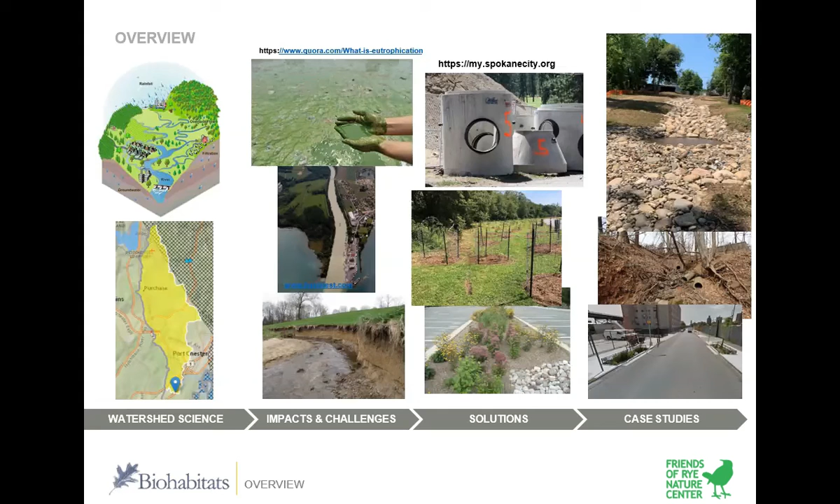So before reading the definition on here, how many folks in the audience know what a watershed is? Okay, cool, so everyone kind of knows what a watershed is.

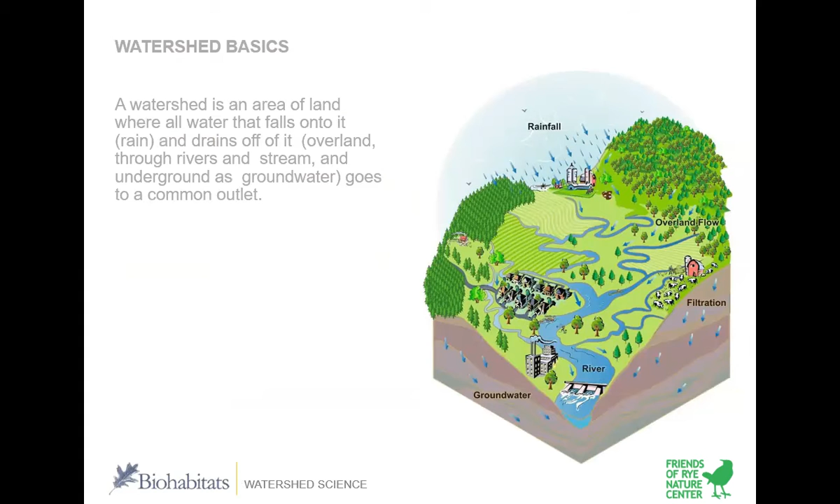A watershed can really be anything where water falls. It's essentially the delineation of an area where any drop of water that falls on that area goes to a single point. So all of our land is part of a watershed, but watersheds can also be as small as a rooftop, draining to the gutter on your house. It could also be like the Mississippi Basin, which is almost half the country. So it really depends on where you're defining your outlet point for what a watershed is, and thinking about how you're going to manage the land in that watershed.

So really thinking about scale for all these projects is important, because that's going to depend on how much water you're dealing with and the types of problems you're dealing with within the watershed.

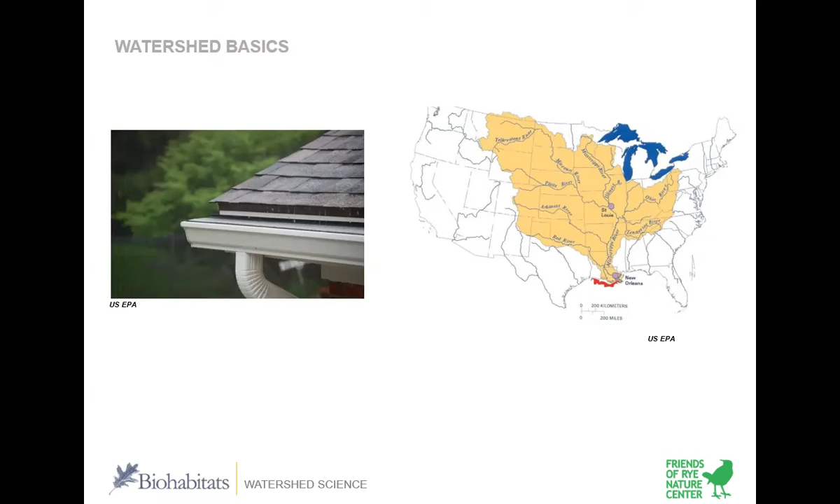It's pretty preliminary, so we use it for high level analysis—like what's the rough size of the watershed, or what might the 2-year storm event look like, just to get a sense. We do more thorough modeling and analysis when we're actually designing a project on a site. But it's a great tool for folks to use to click and see where the water adjacent to their property is coming from.

So as we're thinking about how water is moving through watersheds, and thinking about flooding and water quality, what might impact how water is flowing in the watershed? Anyone have any thoughts?

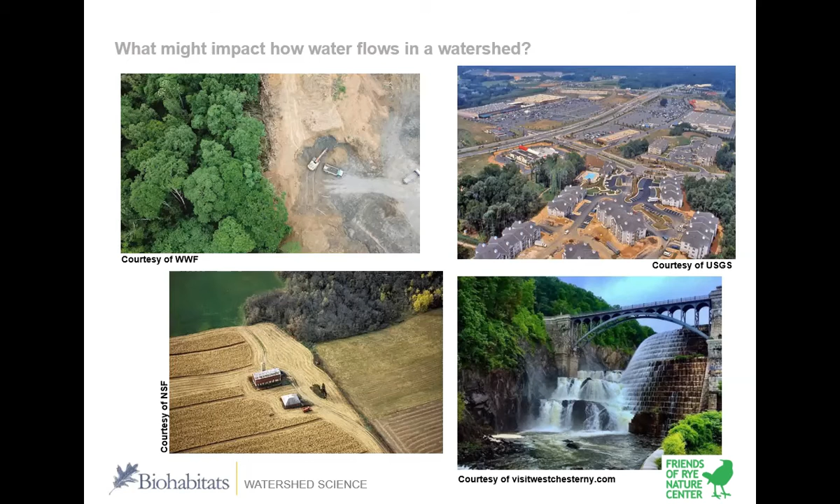When you start to remove trees, even agricultural land or meadows, and you start to see more parking lots and buildings, that has a really dramatic impact on how water flows through the system and the quality of your water bodies—your receiving water bodies throughout the watershed.

When you change an island like Mannahatta into Manhattan, and it's completely covered in asphalt, buildings, and concrete, it's a very different system when water's falling on it than when the Native Americans lived here.

As a water resource engineer, thinking about resilience and flooding, especially in urban systems, the main thing we look at, or one of the primary things, is impervious cover. Have folks heard of impervious cover before? Seeing a lot of nods. If you're used to flooding, then I'm sure you've heard about it quite a bit.

In a forested landscape, water lands on the surface and infiltrates into the ground. Before it even lands on the surface, trees and plants are intercepting that precipitation. A lot of it infiltrates into the ground and moves slowly through the subsurface as groundwater, slowly making its way to a stream, river, or lake.

When you start to put roads and buildings onto a landscape, there's nowhere for that water to go—it doesn't infiltrate into the ground. It's usually moved through pipes, whether gutters or subsurface pipes, to quickly get that water away from human property as quickly as possible. That has a huge influence on how water's moving throughout the entire watershed.

Can I ask a bit more about piping in general? If we take what's occurring naturally to the watershed, some would argue that solutions for flooding issues or water problems is actually piping things in different directions. Can you give your insights on how that may affect the watershed and natural flow of water? I don't really know what that entails or why people argue for that.

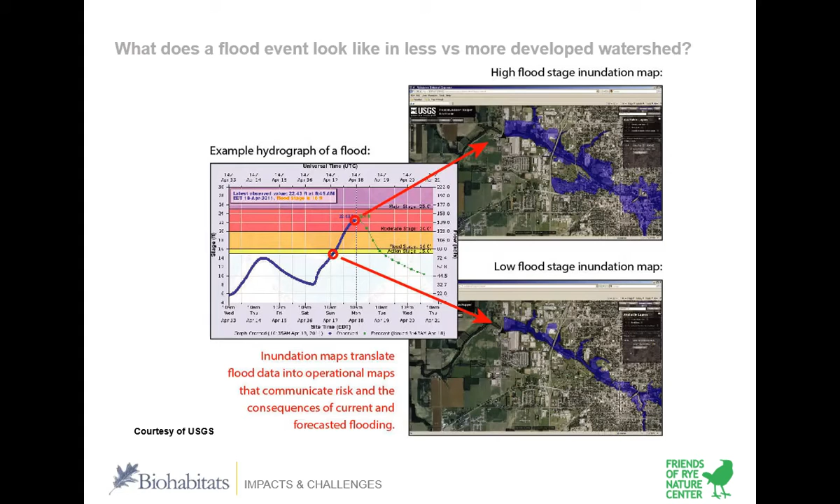Cool. So that's the brief hydrology watershed basics. Is that kind of clear to everyone? There may be questions on how that works. Then moving into how does the urbanization of a watershed, what does it do to our ecosystems and to our water bodies? And what are some of the issues that we've seen?

I'm sure you guys have probably seen this throughout your neighborhoods or your community: erosion, especially during these large events. When you get that flashier system, you have higher flows, higher velocities, more scour in your streams, and that results in this dramatic erosion in channels and at outfalls. And that's exacerbated even further when you start to remove riparian vegetation like trees and shrubs, because those roots are holding that soil in place. Once you remove those, it just starts to eat away and erode. That causes all kinds of problems, especially if you have structures adjacent to these banks, but also all this erosion means sediment is moving downstream.

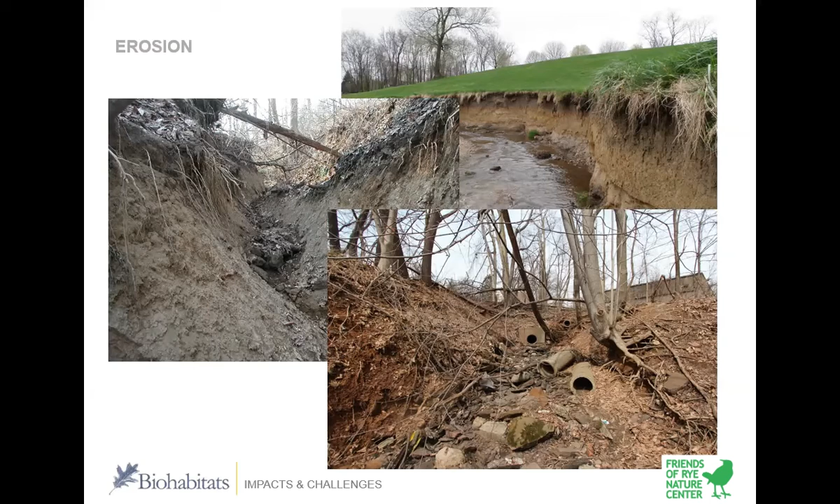And then very briefly, I did want to talk about combined sewer overflows, because one of the case studies that we look at is concerned with combined sewer overflows. And I know it's common in the Northeast. Have folks heard of combined sewer overflows before? Okay, cool. Getting nods. Not always the case.

So it's pretty gross. In a lot of older cities, the storm drainage, the pipes that collect all the rainwater, are the same pipes that are carrying the sewage from your house to the wastewater treatment plants. And they're only sized to a certain carrying capacity, a certain flow rate. So during some large storm events, that capacity is exceeded, and all the material that's in that pipe is discharged out to a water body because the treatment plants can't handle it.

And I think in most of the communities, if not all, in Westchester County, it's all separate sewers. So your sewage and your stormwater are separate, and so it's not as much of a concern. But I did want to just talk about this because it's a big issue in New York and in New York City, and that's one of the case studies that we're going to look at.

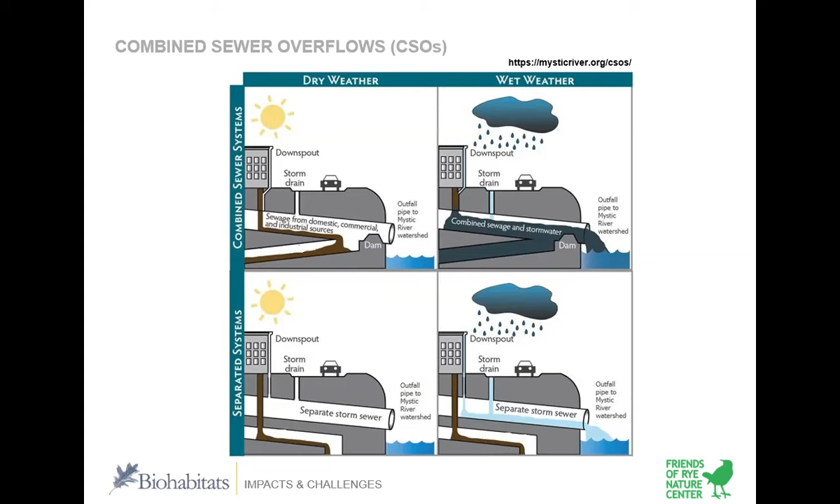So the impacts of erosion, the impacts of impervious area, combined sewer overflows, basically changing how the water is running off the land and what it's running off over, roads, agricultural lands, has a lot of water quality impacts too. And so I know, especially given all the big storms over the past summer, water quantity, like volumes and flows, is a big concern, but a lot of times in the work that I do, water quality is really the driving force, especially of some of these nature-based solutions, because even small rain events, like a 1-inch rain event, can have really negative implications for water quality, because you have fertilizers running off into water bodies.

Even with that erosion, you have all that sediment going off. And so it causes turbidity. It negatively impacts aquatic vegetation. With all the nutrient runoff, you get a lot of algal blooms, which obviously can shut down water bodies in terms of recreation. And then you get fish kills, really poor for aquatic life. And so a lot of the work that I do is driven by improving water quality in the receiving water bodies so that it's suitable for aquatic life and for recreation for humans. And again, the key things we're looking at are nutrients and sediment; in a lot of the water bodies that I work in, those are the primary drivers that we're looking to control.

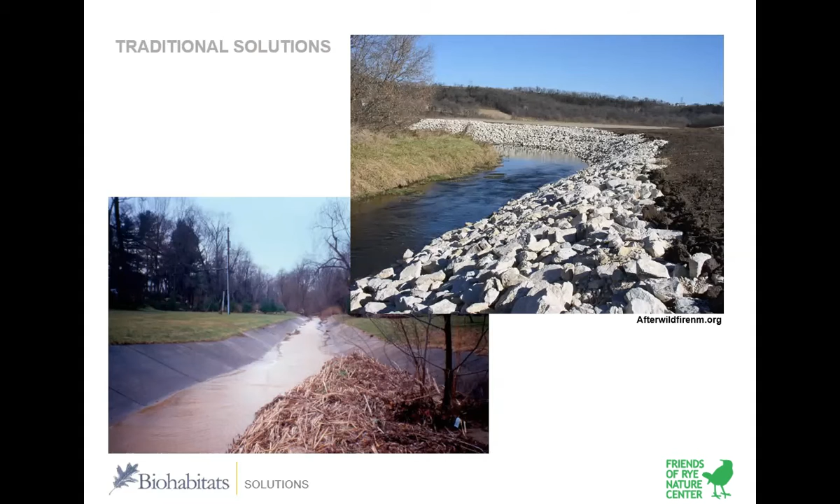And then on the water quality side of things, we do have wastewater treatment plants. For combined sewer overflows, they have large tanks that just hold the stormwater and slowly release it into the sewer system so that it doesn't overflow.

Again, these are really large, what's called gray infrastructure. So big tanks, big pipes. They're effective. They tend to be very expensive. They're also not very adaptable. So you build a tank or a wall or a pipe to a certain size, and it's going to only convey what that design flow is. And they don't really have many co-benefits. They're not providing any habitat value. People aren't recreating with them.

So just some of the considerations that, at least firms like Biohabitats, we're really excited about the nature-based solutions because they offer some of those co-benefits. But again, want to be clear that oftentimes it's a combination of gray and green that needs to be done to meet goals, especially when we're thinking about really large storms like the ones we've seen.

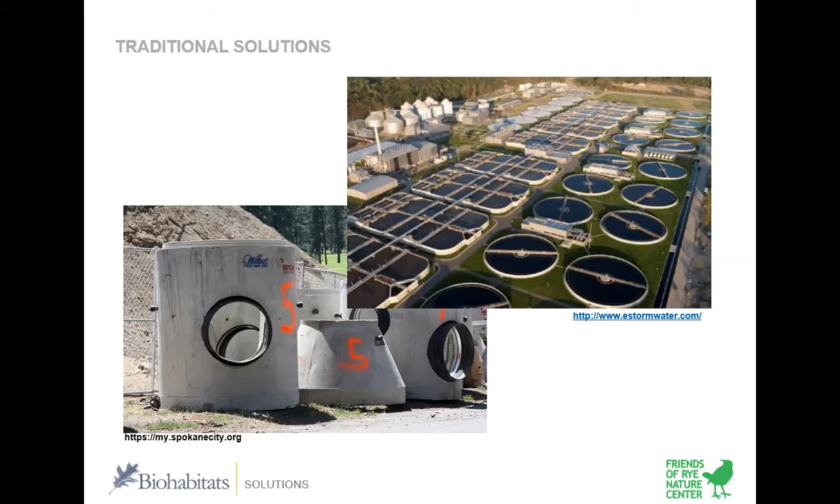In terms of the nature-based solutions, I'm going to go through a couple of general strategies and design approaches that we take. I've tried to group those strategies into 3 levels of design. So there's conservation, restoration, and regenerative design, going from least intensive design to most intensive design.

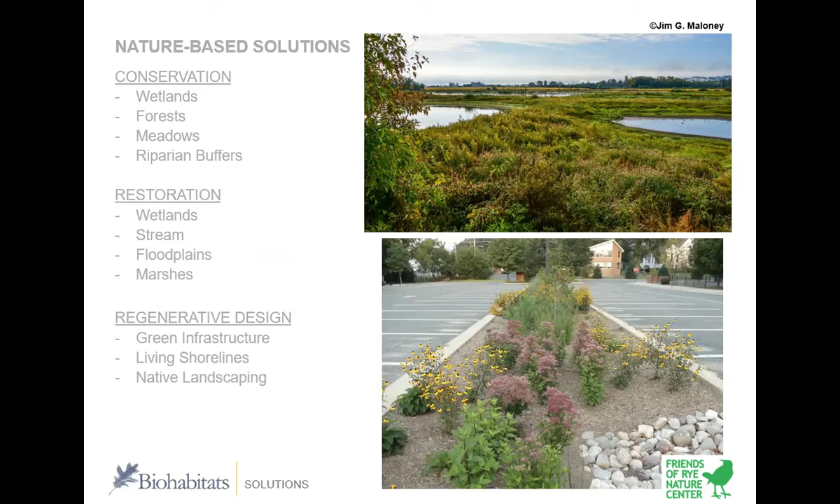And they all relate to these natural systems that we're familiar with: wetlands, forests, riparian buffers, whether it's trying to preserve those ecosystems or trying to mimic them or restore them, or really just trying to take the function that they provide in the landscape and mimic that through an engineered design in a more urban system.

So I like to start with conservation because I think it can be the easiest in some instances. If you have a healthy ecosystem like a wetland or a riparian buffer that already exists in your watershed, try and do everything you can to preserve it. And so there are state regulations, obviously, around wetlands and everything. Those things exist, but I think it's easy to say, oh, I'm going to just develop this wetland, but we'll mitigate it elsewhere. And so I do think that conservation where it's possible is really important.

And I know I'm preaching to the choir here. You guys are at the Rye Nature Center, but I just think it's really important to note that, because so many times, especially engineers, we just come up with an engineered solution to something. And oftentimes, if there's something that exists, it can be more valuable than whatever we design.

And when you're thinking about conservation, a large bit of planning and assessment needs to go into that. So you need to know what resources you have within your watershed or on your property. Is this wetland high value? What kind of value is it providing? And so there is some planning that might need to go into that.

But a lot of communities, I know Westchester County is going through this right now with a couple of watersheds, through watershed planning activities and watershed management plans. These types of resources are identified, and you can kind of move forward then knowing that we have these resources in this area of the watershed that need to be preserved.

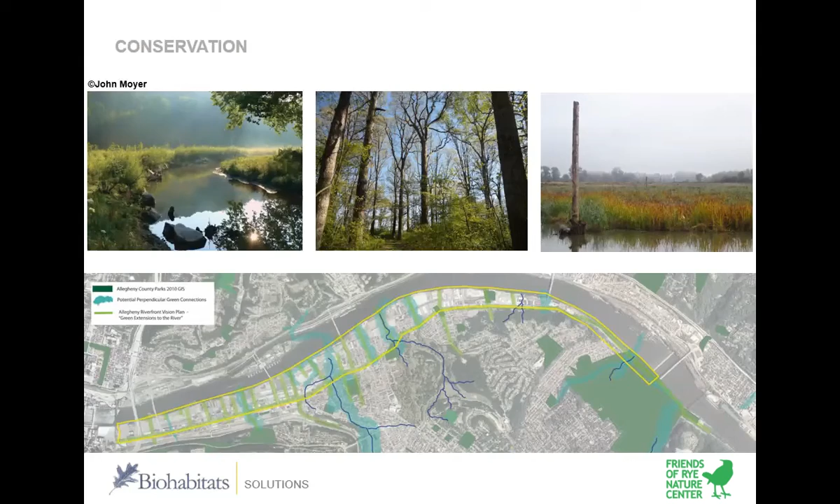Or residents. I'm a resident too, I'm also in a watershed in New York City. This slide was just to demonstrate that...

We recently completed a study for an area in upstate New York, and we found that wetlands on average can be valued at like $500 to $1,000 per acre in terms of their flood mitigation potential. It really depends on where you're at, because when you think about flooding and vulnerability, it's how much flooding, but also what are those assets that are going to be flooded, how valuable are they. So it's hard—I don't like putting a monetary value on it, but it is helpful for a lot of people to see that.

In a lot of the areas where we live, especially in the Northeast, you don't necessarily have a lot of intact forests or wetlands to conserve, so you might need to be a little more proactive. Oftentimes we'll be asked to do restoration projects, often on agricultural lands or old vacant lots, where we're trying to restore the ecosystem that was there previously—restoring the ecosystem services of flood mitigation, water quality improvement, and habitat that those ecosystems provided.

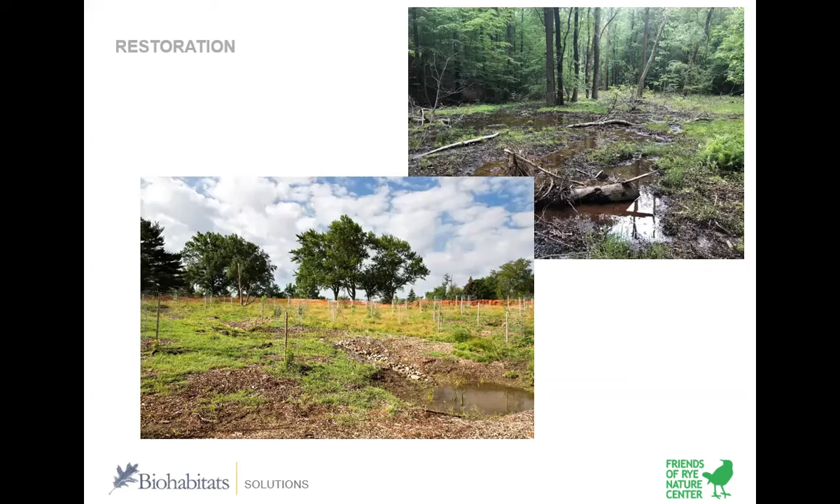Even in areas that are more developed or manipulated by humans, you can still do restoration. The bottom left here is an old golf course where we did a large restoration, restoring a wetland system by creating microtopography, planting native vegetation, and diverting flows through the landscape to restore natural hydrology. The top right photo was an old eroded gully where we created a vernal pool wetland system, again trying to restore what a natural ecosystem would look like in that context.

Restoration doesn't always have to involve heavy grading and realignment. We often do a lot of native planting for restoration work. These are two riparian buffer planting projects we've done, one in Connecticut and another planting native tree species along a river. This restores habitat, provides stabilization to the soil so it's not eroding, breaks up the soil, and promotes infiltration.

I know when speaking with Laura that you guys are doing some of this activity here. New York State has a really good program called Trees for Tribs, which gives money to communities to plant trees along tributaries. This is pretty straightforward and doesn't require heavy machinery or equipment, but we're restoring some of that ecological function to the landscape.

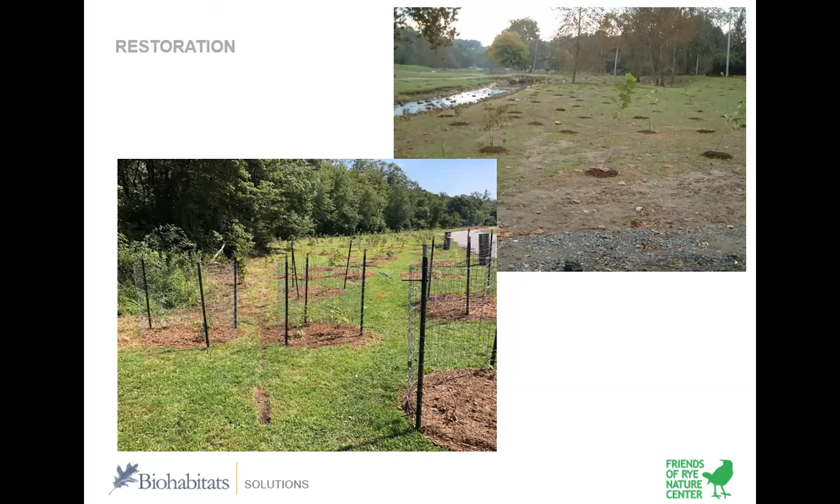Moving on to what Biohabitats, or what I'm calling regenerative design, these are interventions that are a little more heavily engineered. The idea is to mimic natural systems rather than completely recreate them, mimicking their function on the landscape and what they provide to the watershed or contributing drainage area to a water body.

They can look very natural, but they're generally in more constrained areas. Here we might be looking at what we call regenerative stormwater conveyance, which is what the top two photos show. I'll get into more detail in one of the case studies.

Or living shorelines. You have these hardened shorelines in most of our urban areas, and we try to soften those with natural features like wood, stone, and vegetation. They can look very natural, but are generally in smaller areas and are designed to optimize ecological ecosystem services and function.

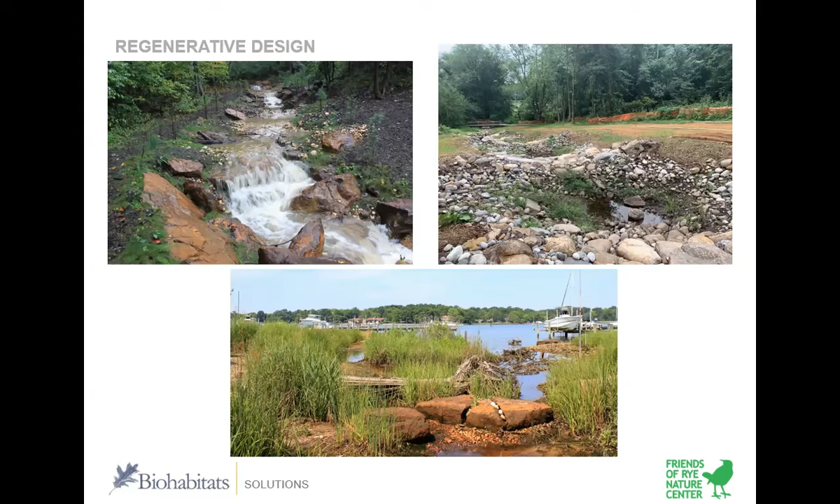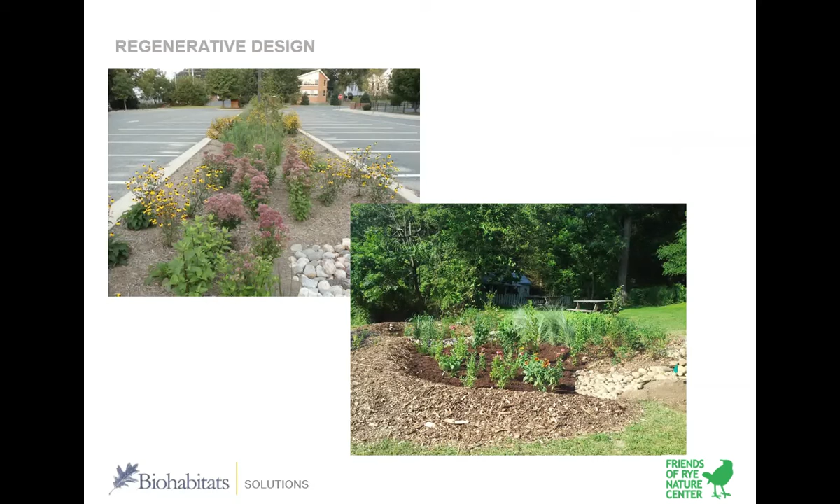Getting even more constrained, into more urban environments, are bioretention systems or rain gardens, which folks may be pretty familiar with. You often see them in parking lots along roadways. These systems are very easy to install on private residences, managing runoff from your roof or driveway, and they can also be really large. They're effective because they can be retrofitted into parking lots or places where impervious areas are already dominating the community, helping restore some of the natural hydrology by infiltrating water or having plants take it up.

I'm going to quickly go through the next two, but happy to talk more about them if people have questions.

Even more urban are green roofs. They've definitely gained popularity recently. They probably don't provide as much water volume benefit as some of the other interventions we've talked about, but they do have co-benefits for pollinators and can be really nice aesthetic features. If you have rooftops, people can go up and picnic, like at Brooklyn Grange in Brooklyn, which is a huge farm that actually sells produce. I'm a huge fan of green roofs. They're a little more challenging since you need structural engineering involved, rather than a rain garden, which can be as simple as digging a pit with good infiltrating soil in your yard.

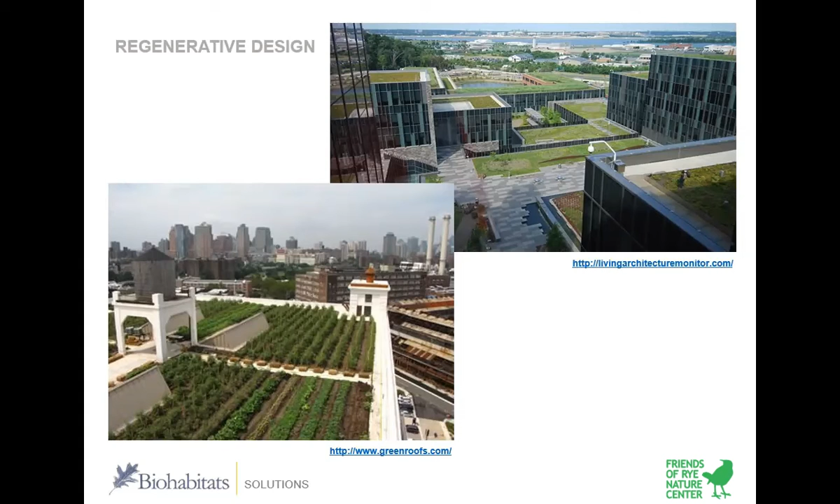Happy to talk more about rain gardens too, if anyone's interested in installing one. It's fairly straightforward, just some slight engineering that you would need, and there's good guidance online from UConn on that.

So those are the solutions I wanted to touch on. I'd love to dive into any that people are particularly interested in. Also, realizing how we're doing on time, I do have two case studies, one in New York City and one in Bergen County, New Jersey, that might be good prompts to get people thinking about how these are applied. If anyone has questions on any of those solutions, from general conservation planning to restoration projects to some of these more engineered regenerative systems, feel free to ask.

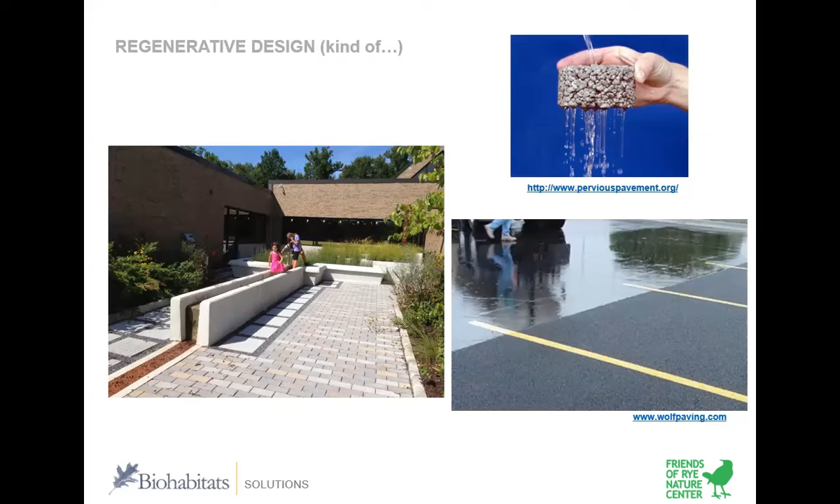I mean, yeah, it can be similar. This is my world, my profession, and I don't think anyone has a real clear definition—everyone defines things differently. New York State DEC does distinguish between bioretention and infiltration basins or swales. It depends on what vegetation is in there and probably what the design layout is. Swales are generally thought of as more for conveyance, so you can think of it as a vegetated surface conveyance system. An infiltration basin is designed to infiltrate, but it doesn't necessarily have to, and it also doesn't need to have vegetation in it. A bioretention system is going to have vegetation in it—bioretention is basically the same thing as a rain garden. I'd say the DEC's stormwater manual is probably what I'd use for definitions, but the idea is the same: if you install an infiltration basin or a rain garden, it's providing a lot of the same services. You'd probably just want to plant it with native vegetation because then you get pollinator benefits and things like that.

All right, cool. So to go through how some of these solutions are implemented in the real world, I thought we could talk about what New York City is doing in terms of green infrastructure. Are folks familiar at all with New York City's green infrastructure program? It's pretty robust and one of the older ones in the country. Raise a show of hands—anyone familiar with it? Okay, cool.

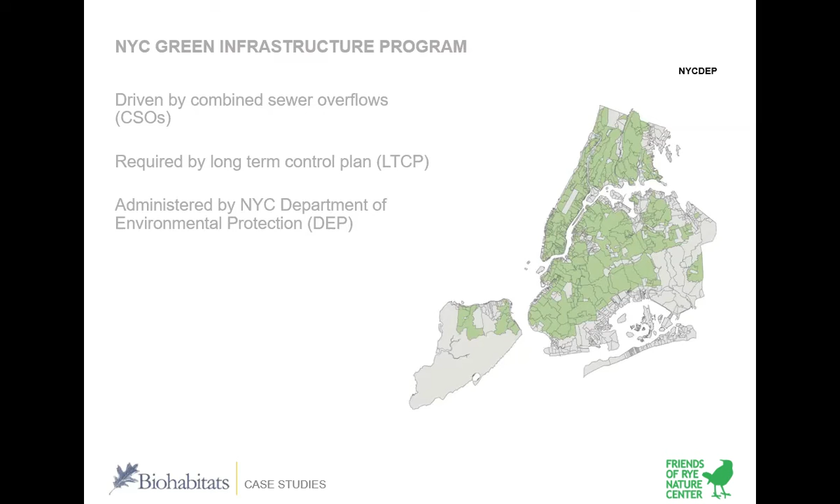It's pretty exciting—they started in 2010 looking at green infrastructure, and it's largely driven by combined sewer overflows, or CSOs. All of the green areas on that map are areas that have combined sewers in New York City, so they have a huge issue with combined sewer overflows. Storms of just an inch or more will cause overflows. My neighborhood is in a combined sewer area near the Gowanus Canal—you go down there and you smell it, it's pretty gross. Their green infrastructure program is being driven by combined sewer overflows and required by the state through their long-term control plan. They've been at it since 2010, and it's New York City DEP that administers it. It's pretty impressive what they're doing.

They're attacking it from multiple angles, largely targeting public property because that's what the city owns and has control over. That's where they can implement projects without needing approval from private landowners. So they have right-of-way green infrastructure—going into sidewalks and roadways—public property retrofits on parkland and schools. They also have some public-private partnerships, and a grant program where they'll actually pay for all the design and construction of green infrastructure.

So the idea of this program is to manage a certain size storm, a pretty small storm, and infiltrate or hold that water before it gets to the storm sewer, the combined sewer system. The idea is to have a bunch of these decentralized assets capturing water within a small watershed. Think of a watershed as even just a block or a neighborhood in the city, trying to have a bunch of these small practices - they call them practices or assets - holding water so that it doesn't reach the combined sewer system. So you're reducing the amount of flow and volume getting into that combined sewer system, which then reduces the number of combined sewer overflows, or the frequency of those overflows. Does that make sense?

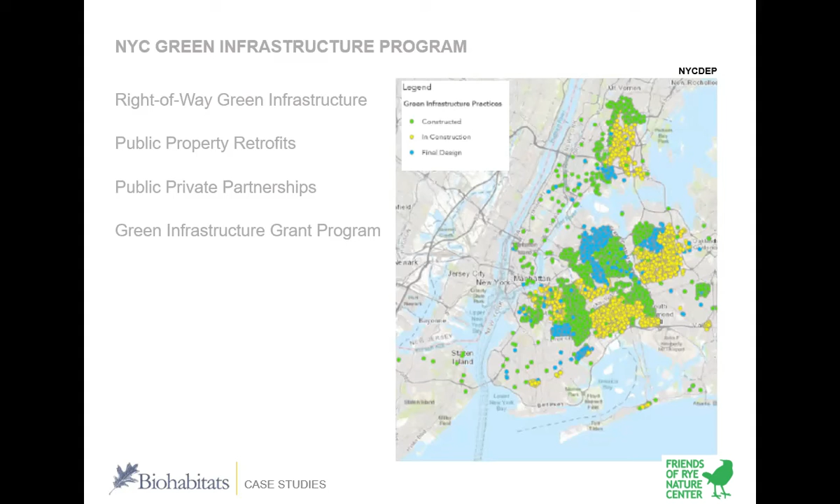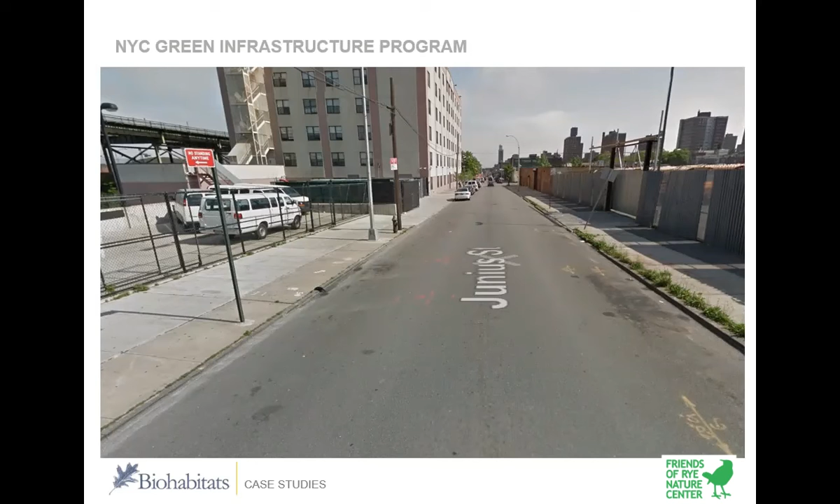I think one of the most common practices they're using is right-of-way green infrastructure, so right-of-way bioswales or rain gardens, and they're going in all over the city. I worked at Biohabitats now, but I used to work at New York City DEP - I started in 2013, and they had a few hundred bioswales installed. Now they're up to like 9,000, maybe more than that.

So this is just from Google Earth, going in basically on sidewalks throughout the city, in all those combined sewered areas, and identifying particular locations where these right-of-way bioswales can go. So like I was saying, the idea isn't that it's taking water out of the combined sewer system once it's in - it's preventing it from getting in there. So this is managing runoff from the road and from the sidewalk. The water goes down the gutter, there's little curb cuts on the bioswale here. Water goes in, infiltrates into the ground, and doesn't end up making it to the combined sewer system.

Do you have any studies that can dictate how many of these things you need in order to have a measurable improvement in the water quality?

Yeah, so DEP - I don't work at DEP anymore, so I'm not speaking for them right now - but I would direct you to New York City DEP's most recent annual report. I know they have a number of research projects where they're trying to look at that. It's going to depend on how bad your CSO is, also how effective your bioswales are, because a lot of it is very dependent on the infiltration rate of the subsoil, and a lot of the soil in New York isn't necessarily great, so you can't even put them in because they need to drain within a certain amount of time. So it's a little bit dependent on site specific conditions, but I think generally DEP did release a report that would give you an answer on how many you might need to impact certain water quality. But then it's even deeper than that, because you have to trace that down to the end of the pipe and what frequency of combined sewer overflows you're reducing, and how that impacts water quality in, say, Jamaica Bay or Long Island Sound. But I would go on their website, and I can send you a link to their most recent report - they might highlight it in there, or at least give links to it.

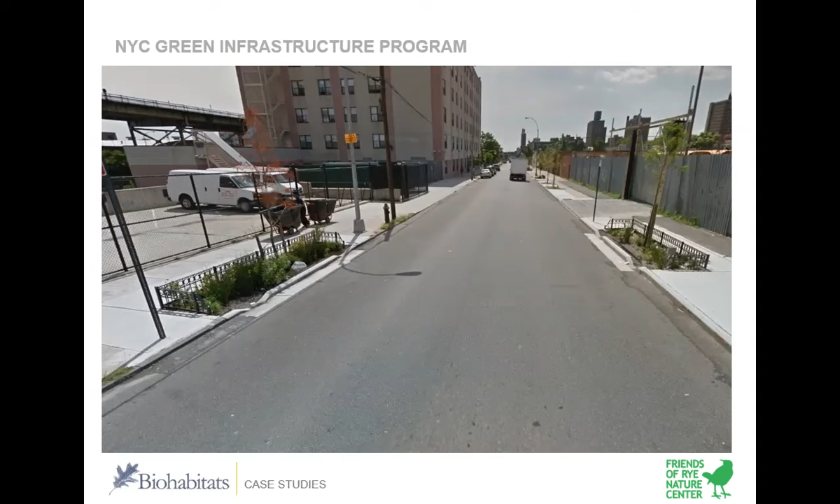Was the question about alternatives to bioswales in terms of managing this? Yes, there are other ideas. The next case study I was going to talk about in New Jersey looks at regenerative stormwater conveyance, more like a constructed wetland system—a bit of a larger system, but that's one alternative. Happy to talk about others during the regular Q&A. Floating wetlands are ones that come to mind. I know in Maryland, in our Chesapeake Bay bioregion, there's a lot of living shoreline work that looks at water quality improvement. So definitely other alternatives out there.

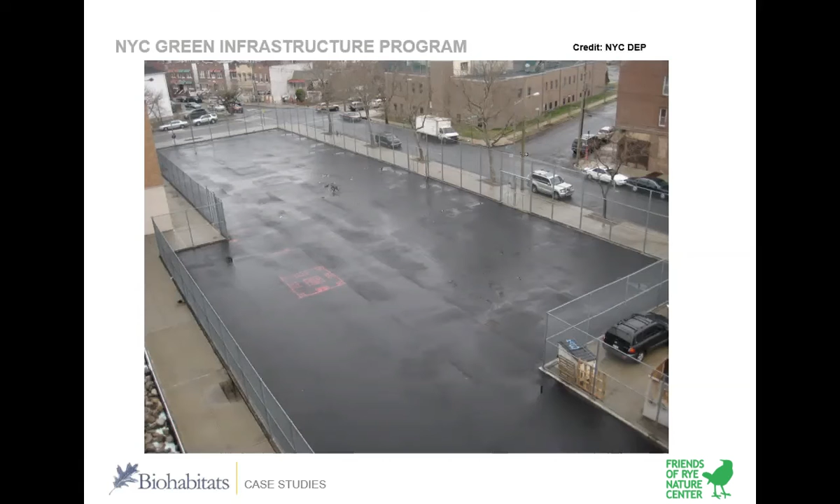But real quick, for wrapping up New York City: they have those bioswales as a large part of the program, and also public properties like schools and parks. This is a schoolyard in New York City, clearly all impervious asphalt. The city is taking a large initiative to go through and redo a lot of these schoolyards and parks to incorporate green infrastructure elements.

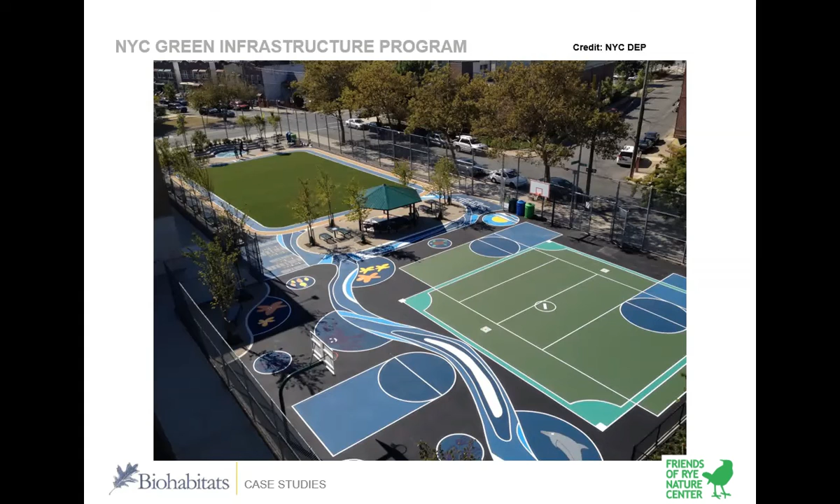There's permeable pavement, permeable turf, infiltration pits. I think this project was done in partnership with Trust for Public Land. Also want to be clear, Biohabitats did not do this project—this is from DEP, from their report. We have worked on the bioswales, but not this project. I just thought this was a good example of how you can transform a very bleak asphalt play yard into something that's more aesthetically pleasing, but also infiltrating stormwater.

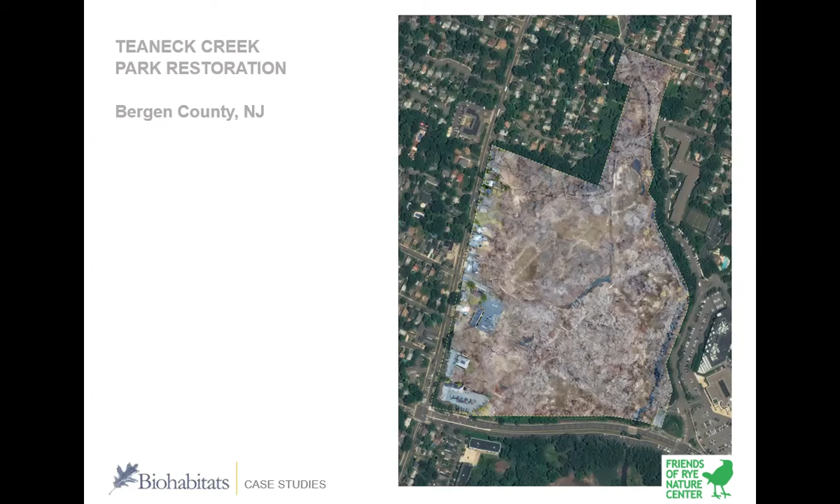Happy to talk about New York City in more detail. But an alternative to bioswales—this is in Teaneck, New Jersey, a pretty dense suburban area. This is a project we did at Teaneck Creek Park in Bergen County. It's a 46-acre park, and our project area is about 26 acres. It's a natural park, with informal trails, interpretive signage, educational components, and some large art installations and sculptures throughout the property.

The Teaneck Creek Conservancy and Bergen County Department of Parks reached out to us, identifying a number of problems in this park. There were major erosion issues—two large stormwater outfalls discharge into the park, eroding gullies, one of them up in the top right corner. That's resulting in poor water quality in the water bodies on the site. They have a couple of small ponds, and all that water goes directly to Teaneck Creek, just east of the park. The whole site was also dominated by invasive species, mostly Phragmites. Are folks familiar with what Phragmites is? It's awful—a lot of Phragmites on the site, not great wetland habitat.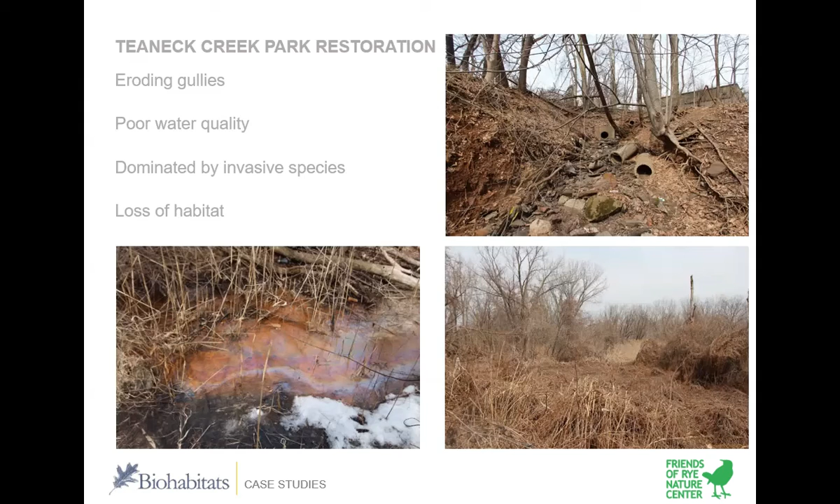Bergen County Parks and Teaneck Creek Conservancy came to us asking if we could come up with a restoration plan for this park, with the idea that erosion and water quality would drive the plan. I know this is probably hard for you to see—I'll zoom into the different sections. We came up with a plan to restore natural hydrology across the site.

There are two outfalls coming out—I think they're 16-inch or 12-inch pipes—eroding these gullies, one here and one over here. The water was basically shooting right across to the creek, creating deep channels. As we talked about before, that was leading to the water getting to the creek faster and off the property more quickly.

Whereas, if this was really a functioning wetland system, that water would be moving through this floodplain and infiltrating into the ground, being taken up by plants. And so we looked at where can we divert the water? How can we restore some more of that natural flow across the site?

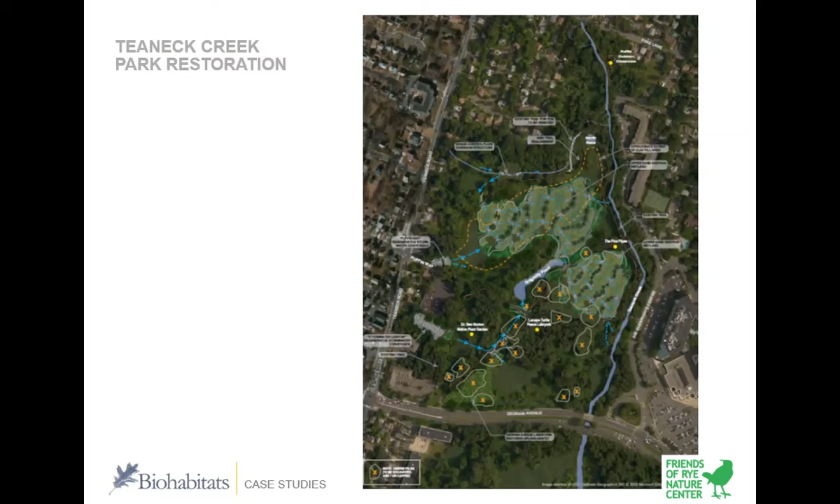And so we looked at, this is the northern part of the site. Here's that one outfall. And then there's a very urban stream on that side too, right here. And we looked at what we call sand seepage wetlands. And so it's essentially a wetland restoration across the site, cleared out a whole bunch of the Phragmites. I'll show you a graphic of what a sand seepage wetland looks like in a moment.

But the idea is that bringing this flow here and letting it kind of come through this microtopography and into this wetland system, it's infiltrating into the ground, it's being taken up by plants, it's being held in these pools and moving very slowly across the landscape rather than kind of just shooting through a channel and eventually making its way to Teaneck Creek. And then same thing with diverting some of the storm flows from this little creek over here, this little tributary. So it's being treated going through this wetland system.

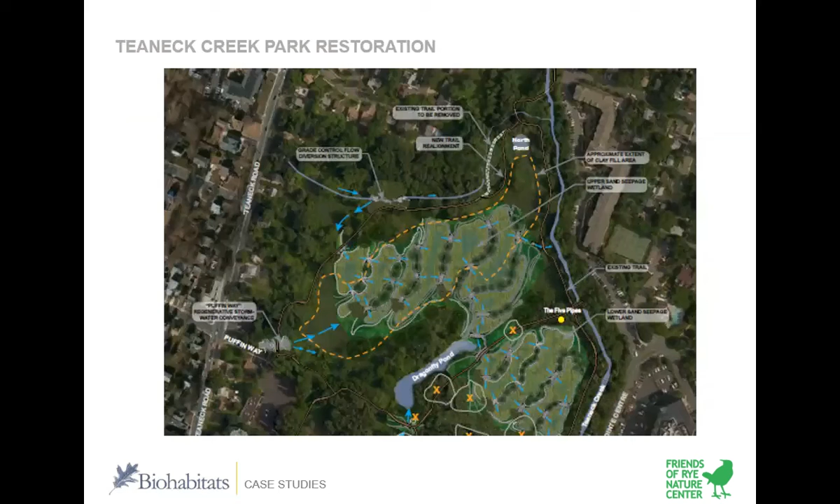And then just to zoom in on kind of the bottom of that graphic, here's the other large outfall. This is like a lot of flow coming out of here. And this more clearly shows the regenerative stormwater conveyance systems. So we installed those on this outfall too. Regenerative stormwater conveyance system, which is a way of dealing with that erosion coming out of that pipe.

And so I show a couple of photos of it, but it's essentially like mimicking a step pool system you might see in some tributaries. So it's got some rocks, it's got some vegetation, it's got some sand, and it's slowing that water down coming through a channel. So we're looking to really change how the water is flowing through the site and try and mimic again more of like a natural wetland floodplain system.

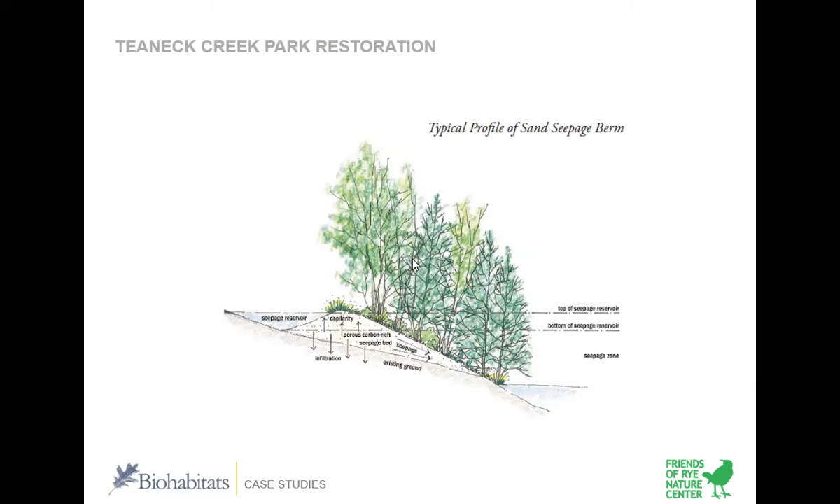This is a profile of the sand seepage wetland. Pretty simple design. Think of it as a berm and some pools, like a pit and mound over a large landscape. And so you get water ponding behind the berm, and then water is infiltrating through it. So plants are taking it up. Again, trying to, as you said, hold the water as long as possible, preventing it from getting to the stream, allowing the plants to take up nutrients and take up water.

So it's trying to mimic a kind of rock cascade system, step pool system in the environment. And so again, slowing the flow, and then it's all with sand underneath. So the water that's ponding there can infiltrate to the sides and down. I do have some photos of the one that's constructed.

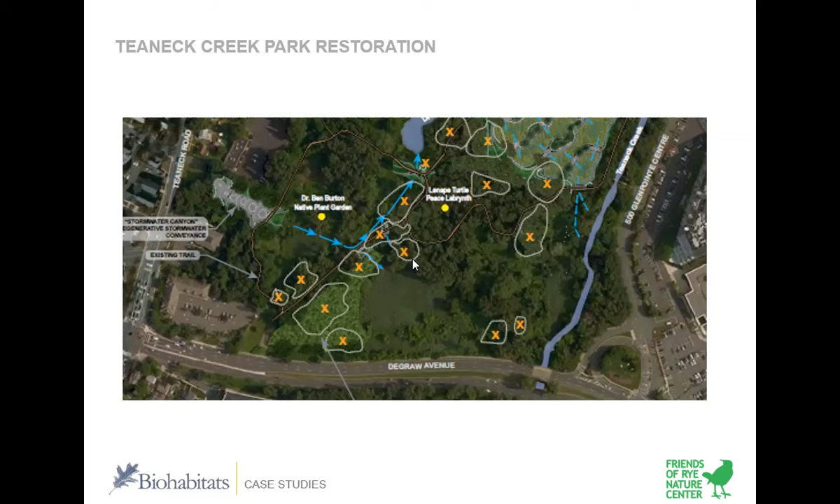Yeah, but I would say that probably a smaller one's a good one to pilot, because you can definitely do a pilot one for a pretty affordable price, especially if you don't have serious flows coming out of your system. Basically identifying any eroding gully is a good starting spot. But I will make a note to send you that.

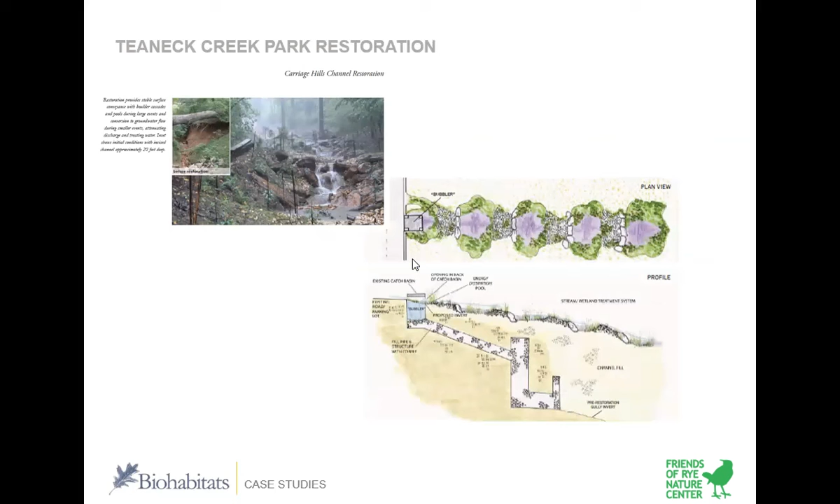So quickly just going through construction of Teaneck, we started it last year, and it just wrapped up all the grading and earthwork. Started with site clearing, so clearing out all the invasives, making way for the construction equipment. And then we started doing the site grading.

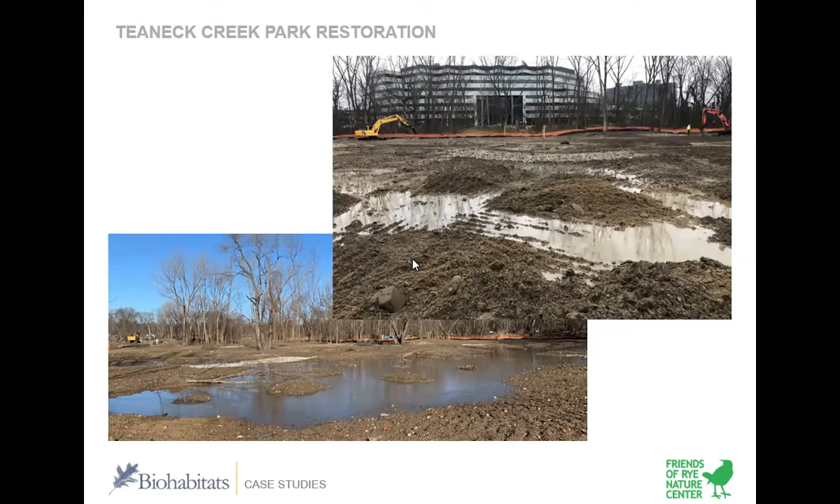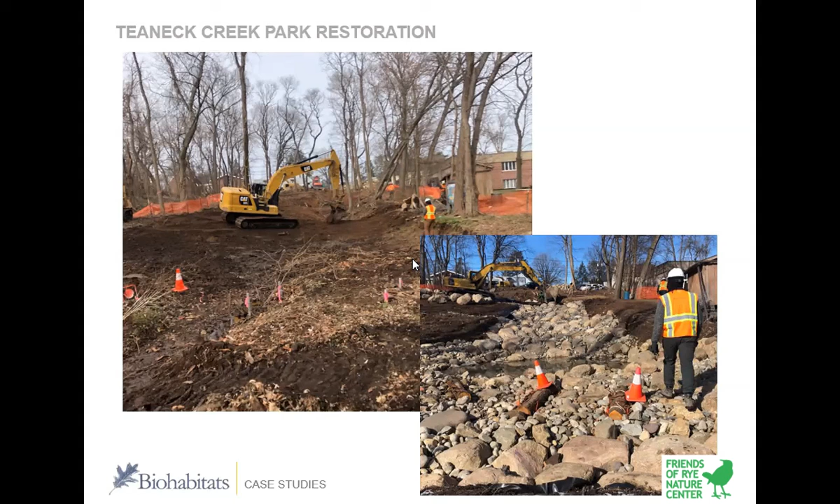And then this is the RSC. So this is essentially complete for the most part, during a storm event, but you can see how the water is moving, it's like the step pool system. This is a very large storm event, so there's a lot of flow. But the idea is over a couple of years, that really becomes vegetated and you don't see the stones as much. I didn't include any photos from some of the ones that we've completed down in Baltimore, but you really just see a bunch of vegetation.

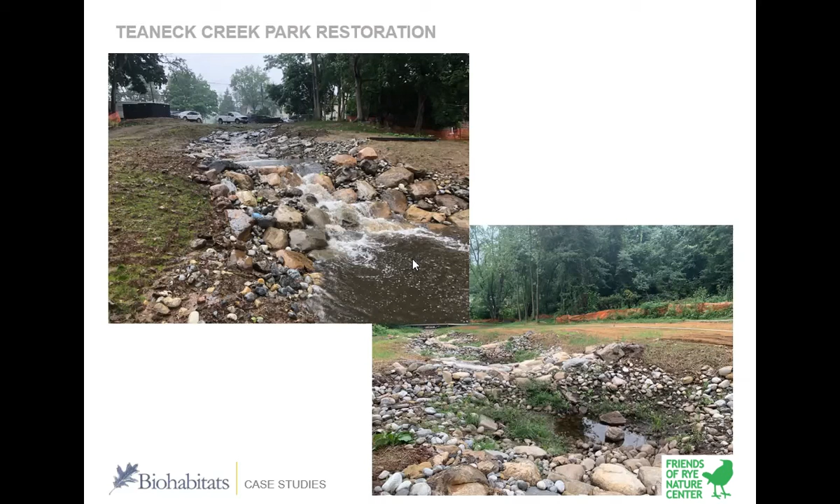But we're happy to talk if there's more urban context questions. We can talk about that too. That was my case study. I have a couple of other ones that we can talk about if questions come up, but that's it.